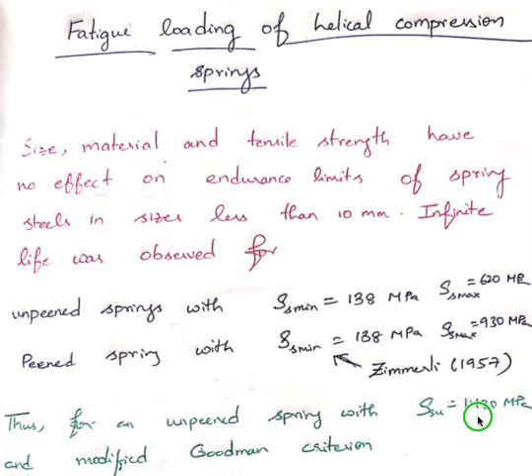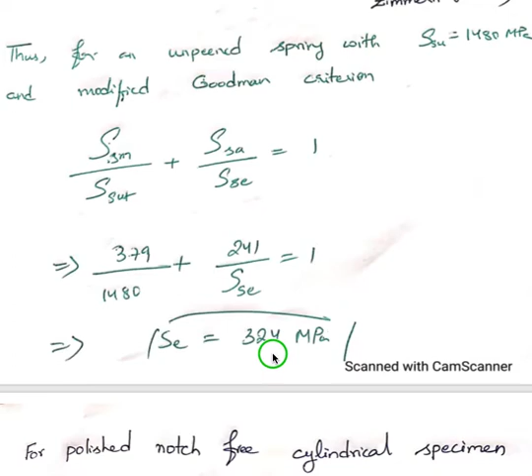So this is one piece of information which is available, which is that the range of stresses over which infinite life is achieved is fixed irrespective of the material and the size that we are dealing with. Using this information, for example, if you are dealing with an unpeened spring with ultimate shear strength of 1480 MPa, then using the modified Goodman criteria, the mean shear stress divided by the ultimate shear stress plus the shear stress amplitude divided by the endurance strength in shear is equal to 1, and using this you can get the endurance strength in shear to be 324 megapascals. So this is one way to approach the problem.

Another observation has been that if you are dealing with a polished cylindrical specimen, then irrespective of the mean stress that you are applying, the stress amplitude at which failure is observed is essentially constant. This particular model is referred to as the Sines failure criteria. The only thing is, for this failure criteria to be applied, the maximum shear stress has to be less than the shear yield strength of the material.

One point to be noted whenever we are using this Goodman criteria or any other fatigue failure models is that the ultimate strength in shear for materials is observed experimentally to be 67% of the ultimate tensile strength of the material. Please note that the relation between strength in shear and strength in tension is a little different from the relation between yield strength in shear and yield strength in tension. That is because ultimate strength is related to failure of the material, and it's also affected by pressure, unlike the initial yield stress.

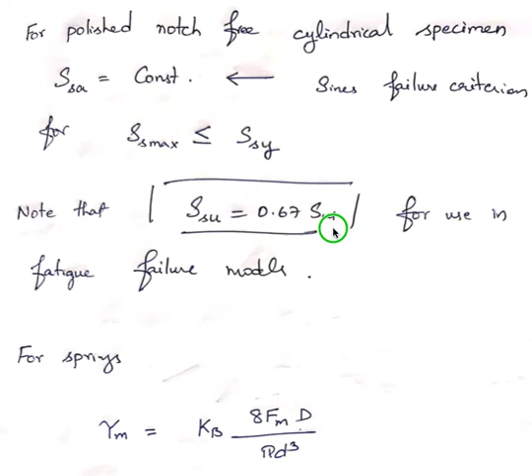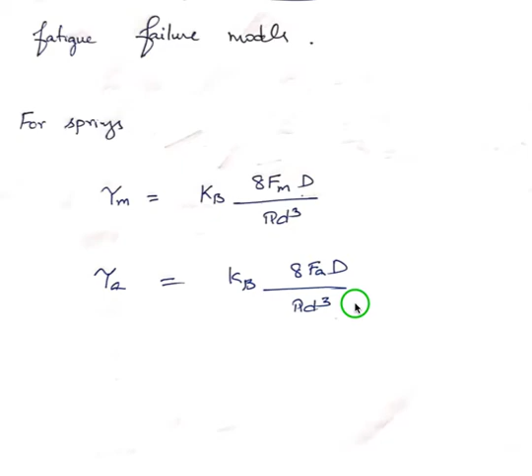So anyhow, when you are dealing with ultimate strength in shear, please take it to be 67% of the ultimate strength in tension. The way we normally approach the problems is, in any problem the max and the min load which the spring is subjected to is given. Using that you get the mean force which the spring is subjected to, as well as the amplitude of the force. Then you use the relation between maximum shear stress and other relevant parameters in order to get the mean shear and the amplitude of the shear. So let's look at a problem in order to better understand how to approach problems for shear. So consider example 10-4.

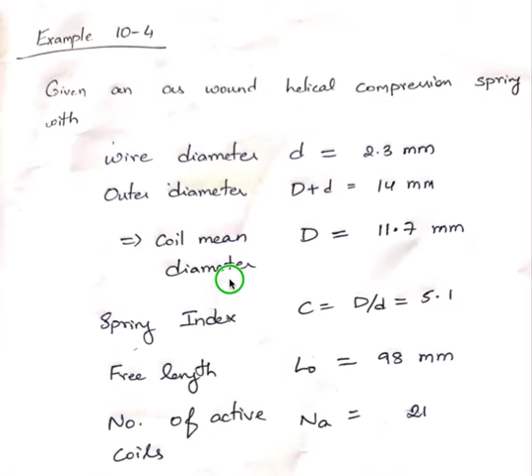So what you are given over here is a helical compression spring with a wire diameter of 2.3 mm. The outer diameter, which is equal to the mean coil diameter plus the wire diameter, is 14 mm. Based on this, you can estimate the mean coil diameter to be 11.7 mm. The spring index turns out to be 5.1.

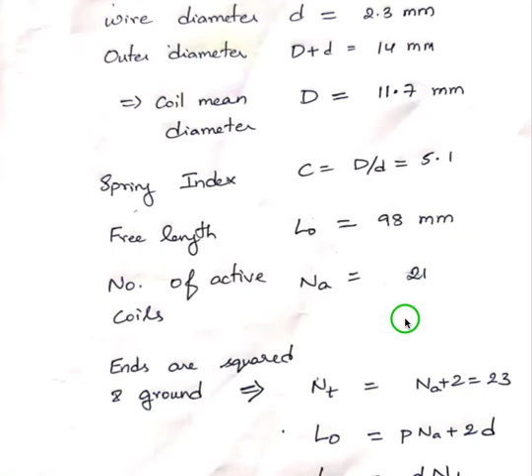The free length is given as 98 mm and the number of active coils is given as 21. It's a squared and ground end condition. For this, you can estimate the total coils as equal to the number of active coils plus 2, which is 23. The free length is equal to pitch times the active coils plus 2d, and the solid length is equal to d times nt.

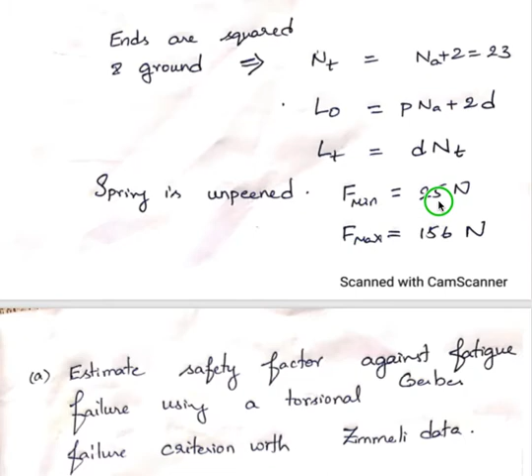Now the spring is unpeened, and the minimum and the maximum loads which the spring is subjected to are 25 newtons and 156 newtons. The first objective over here is to estimate the safety factor against fatigue using a torsional failure criteria using the Zimmerli data.

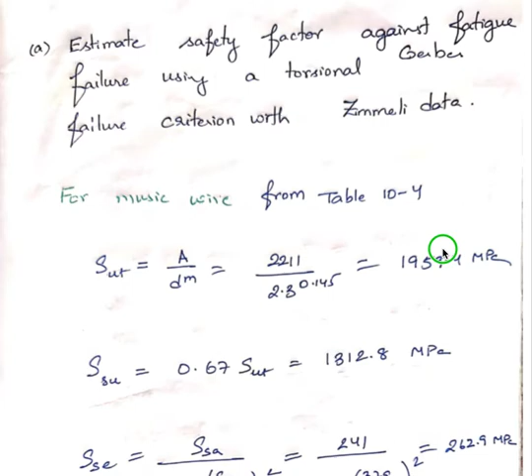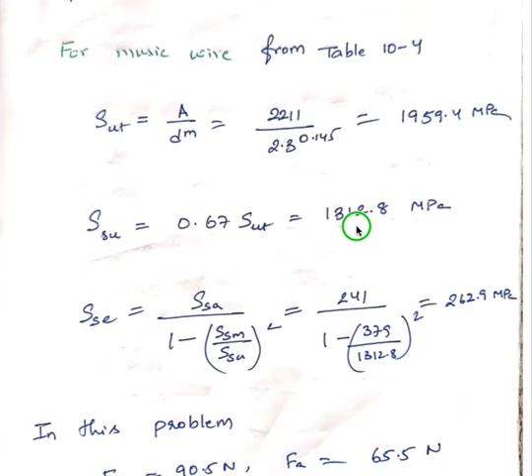For music wire in question, the ultimate tensile strength is 1959 MPa for 2.3 mm diameter wire. The ultimate strength in shear would be 67% of that, which comes out to be 1312.8 MPa. From Gerber criteria, the endurance strength can then be estimated as 262.9 MPa.

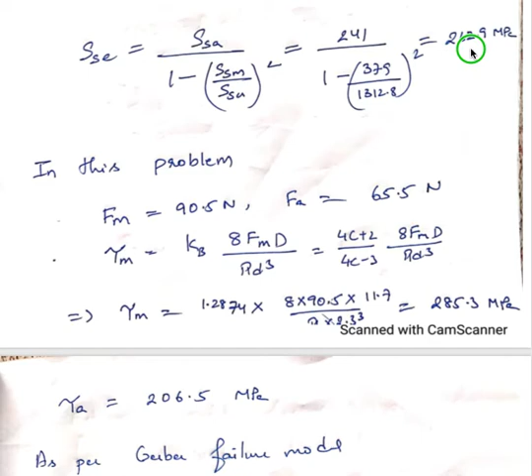Remember that the stress amplitude is 241 MPa and the mean stress is 379 MPa. This would be fixed basically for whatever spring problems that you're going to solve. The stress amplitude and the mean stress at which infinite life is achieved is fixed. So based on this and a failure model, you can estimate the endurance strength of the material.

Now in this problem, the min and the max load are given. Based on that, you can get the mean force to be 90.5 and the amplitude of force to be 65.5 newtons. Using the formulae relating the force and the shear stress, you can estimate the mean shear stress to be 285.3 MPa and the amplitude of the shear stress to be 206.5 MPa.

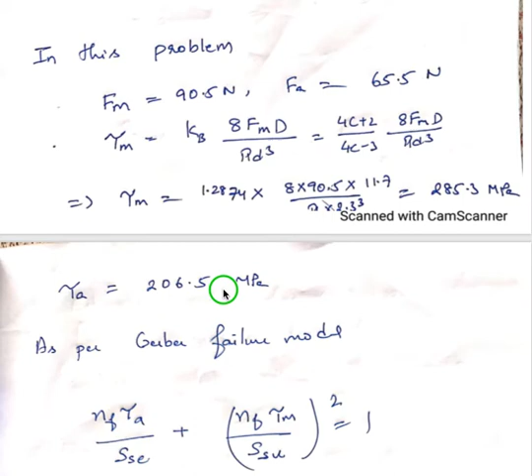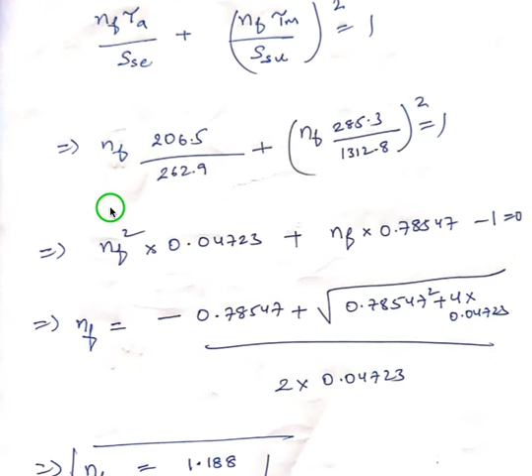Then as per the Gerber failure criteria, we can get the safety factor in fatigue using this relation. You can estimate that to be 1.19.

Now if you were to use the Sines failure criteria, then in that particular case, nf is defined as the stress amplitude at which failure is observed divided by the shear stress amplitude in the application in question. Once again, from Zimmerli data, the stress amplitude is 241 MPa, and in this particular problem, the shear stress amplitude is 206.5 MPa. So based on this, you get a factor of safety of 1.17.

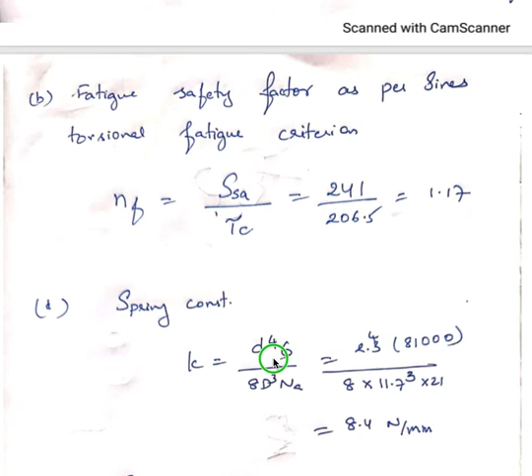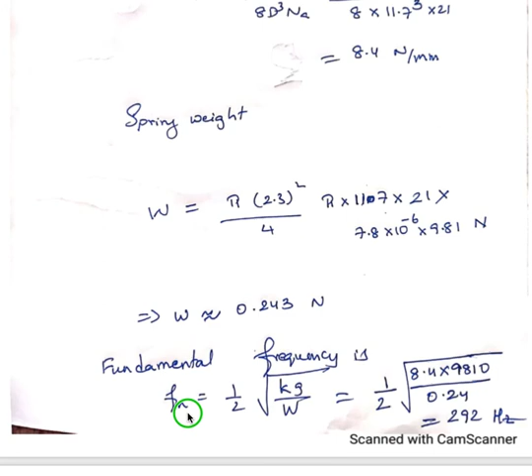The spring constant is obtained through this relation to be 8.4 newtons per millimetre, and then based on this, the spring weight is estimated to be around 0.25 newtons, and the fundamental frequency can be estimated to be about 292 hertz.

It's said that in this case the excitation frequency is 20 hertz, so the ratio of fundamental frequency of the spring to excitation frequency is close to 15, so it's just all right. But you may change the spring design parameters so that this ratio further increases and at least lies somewhere in between 15 to 20. That's it.